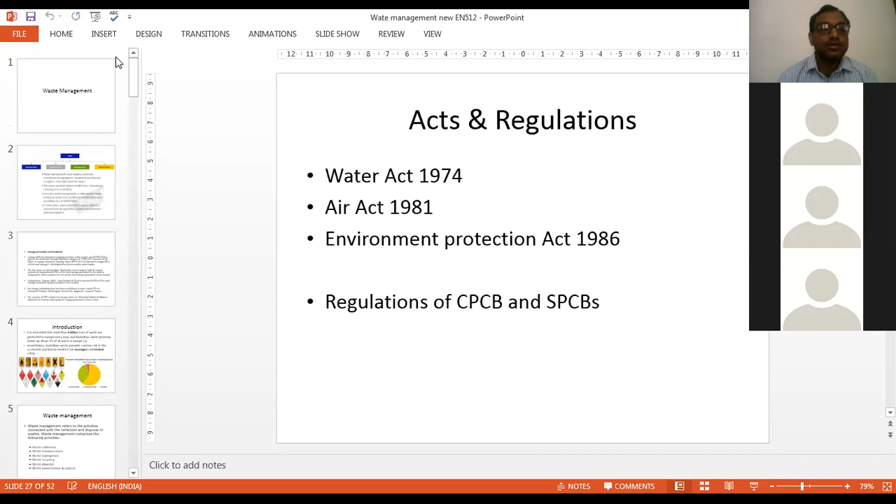So waste management. So I'll quickly run through a few things which you might have already gone through. If not, it will be a quick recap in terms of some concepts and topics. This we have already discussed, what are the different types of waste and all those things. Its management is the crucial one, and that is one of the focus of the third unit.

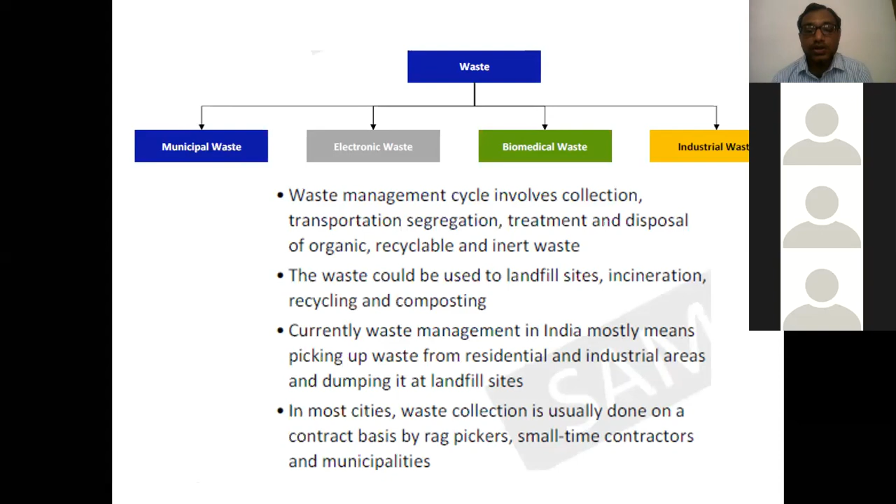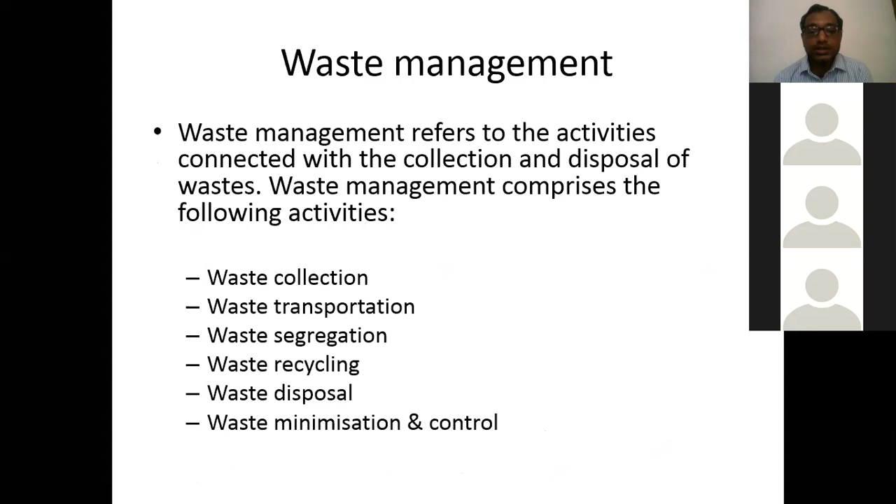So when we say waste management, the important things involved are waste collection, waste transportation, segregation, recycling, disposal, minimization, and its control. There are different aspects which need to be corrected. And from that point of view, several concepts have emerged, and out of that, waste management hierarchy is one of the important concepts. Now, what is the meaning of waste management hierarchy? It is a nationally and internationally accepted guide for prioritizing waste management practice.

So far we kept discussing source reduction, waste volume reduction, waste strength reduction, and then different treatment processes in terms of technical details. So from that point of view, prioritizing waste management practices with the objective of achieving optimal environmental outcome. The environmental outcome is a clean environment, producing less waste or no waste into the system. So there is a certain set out preferred order. What is that preferred order?

It is a tool in the evaluation process that protects the environment alongside resources and energy consumption, from most favorable to the least favorable action. So when we say order, something is called the most preferable or favorable action to the least favorable action. We'll quickly look into the next slide to get an idea of what is waste hierarchy. Again, it is an important basis for sustainable development.

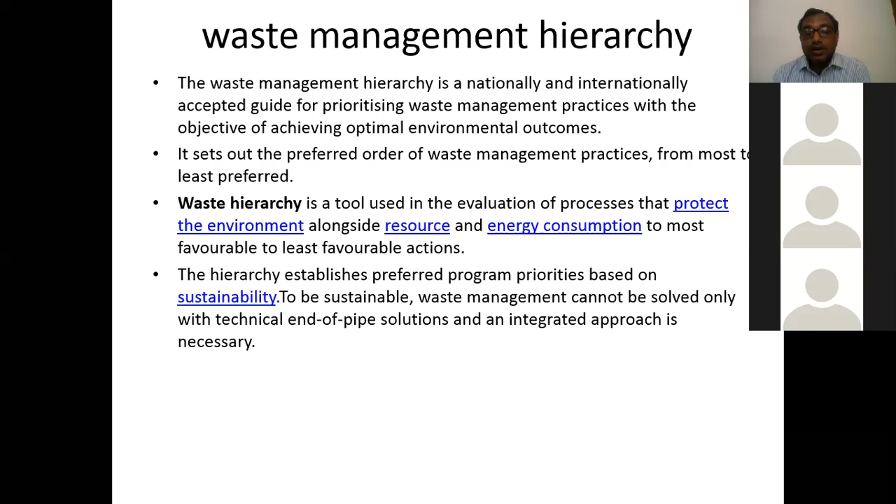Sustainable waste management cannot be solved only with technical end of the pipe solutions. What is the meaning of end of the pipe solutions? Anyone can quickly answer through the chat platform? After treatment. Yes. It means once you create the waste, the waste is taken to the treatment facility and then it is treated. So it is basically an integrated approach, meaning what we discussed as source reduction and subsequently the end of the pipe approach.

So it indicates an order of preference for action to reduce and manage waste and is usually presented diagrammatically. In the subsequent slide you'll get an idea in a pyramid form. Pyramid means something is at the apex, something at the base, so something is considered the topmost priority. From the topmost, if you go to the lower one, that is what we discussed in the beginning, the most favorable or acceptable to the least favorable options. This hierarchy is based on that.

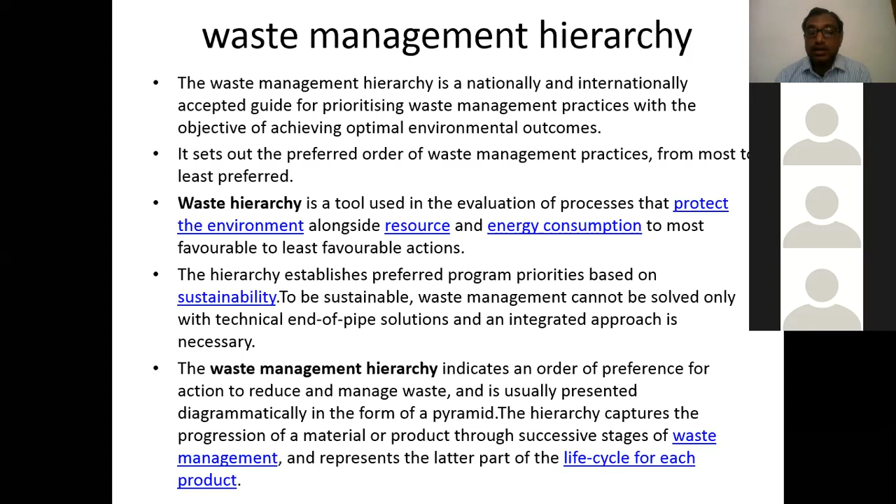And at the same time it also helps the life cycle approach of each product. That's what you are already going through, and one example was given of the food industry. Recently I was going through Science Direct. There are plenty of applications of life cycle analysis or assessment, and new concepts are emerging. Basically there are three different components: analysis, assessment, and one more thing which comes as part of life cycle assessment from the waste management point of view, and it is applicable everywhere. So what is that hierarchy?

So on the left hand side it shows you what you are supposed to do or what is your useful gain, and at the top you are getting what your outcomes are. And at the same time it talks about how you have to approach that pyramid. So the first step is remove. That means don't generate the waste. That is the mantra, or that is the important priority in that particular thing.

Second comes reduce, reuse, recycle, recover, treat, dispose. These are the steps. And if you adopt this management hierarchy, for something you are generating as waste, if you try to reduce and recover and then recycle, as we have seen in the previous slide, you are conserving the resources, you are maintaining the environment, at the same time you are opting for sustainable operations, and based on that you will end up getting the maximum returns in the system.

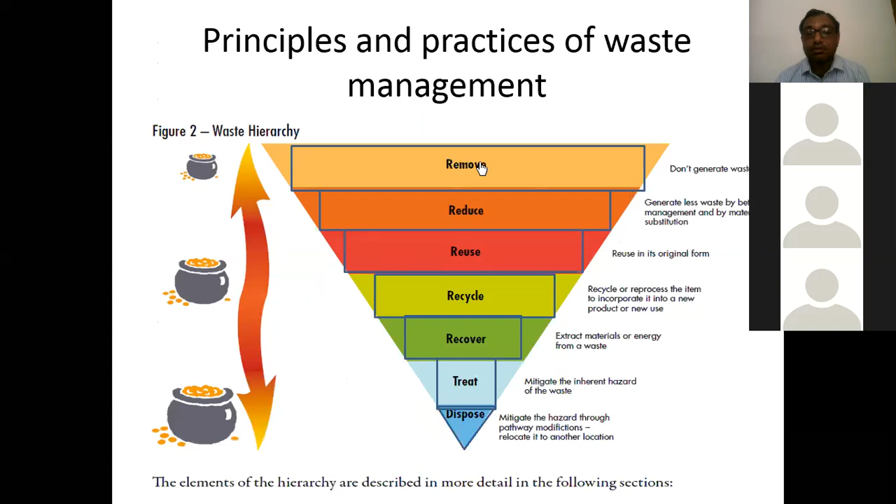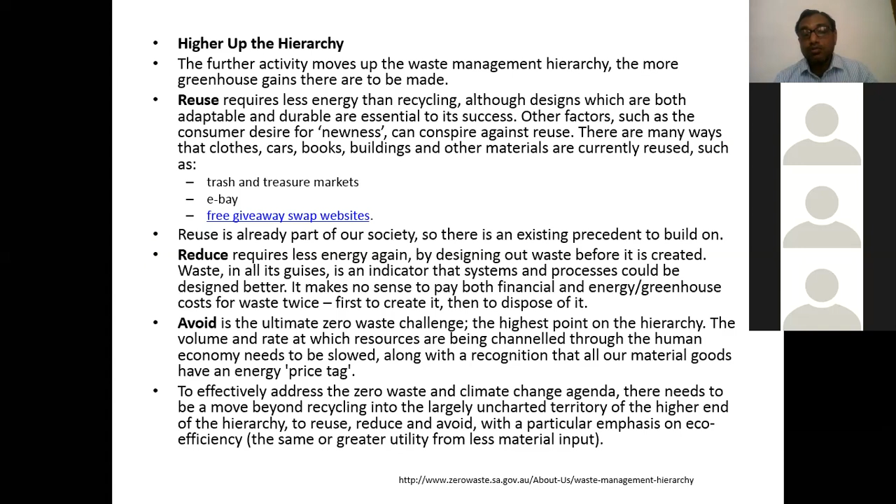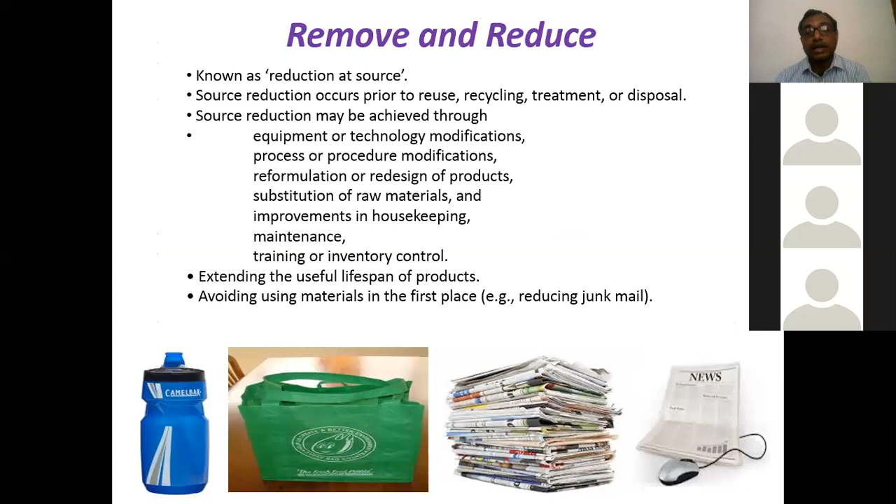So when you say remove or reduce, what kind of articles, activities and substances come in that category, and how those things can be put together. Again, one important point: some of the things are generic. They are not exclusively from the liquid waste point of view, but generally solid waste. Sometimes some of the things are extended to liquid waste as well. So for remove, what are the source reductions? Source reduction can result from any activity that reduces the amount of materials. For example, redesigning of products, which we already discussed, source strength reduction, waste volume reduction. Most of these keywords or key phrases have already been given.

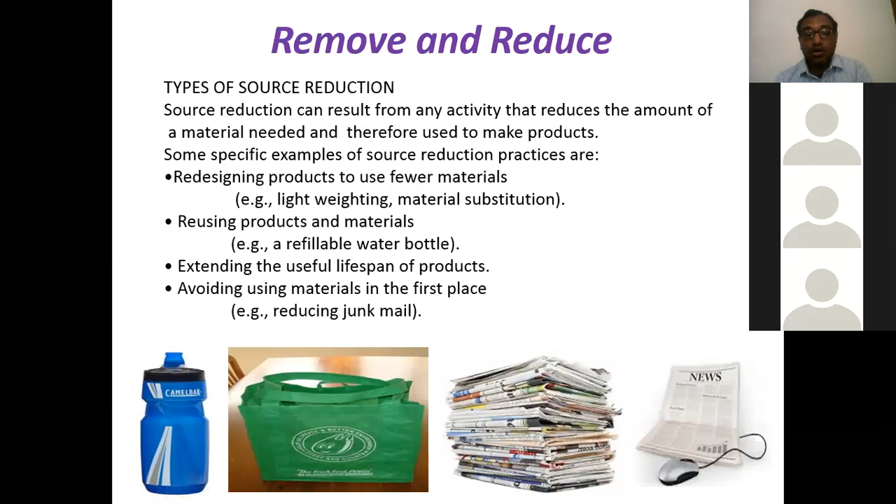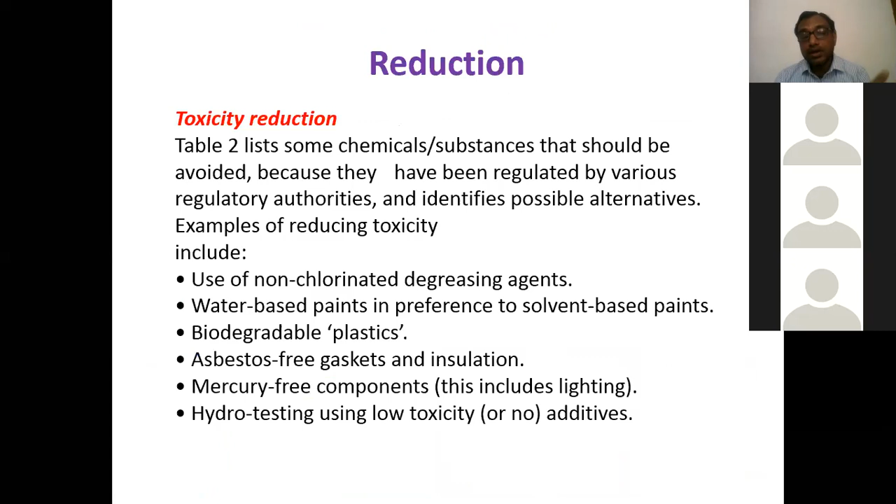And with some examples, some of the things are basically mentioned here. Then reduction: again, it depends on what nature of the material is there, toxic, non-toxic, biodegradable, non-biodegradable. You need to work it out, and accordingly the relevant materials need to be treated or reduced in the activity.

So from the EPA guidelines point of view, some of the substances are enlisted here. Some of this data I'll share with you later on as notes or something. Here, I just want to touch upon the other aspect.

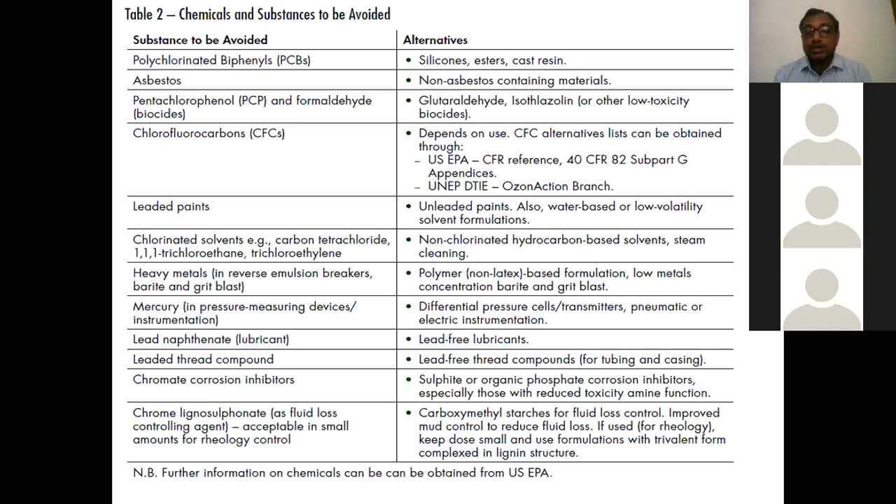So just quickly, there are chemicals and substances which are already identified by EPA and all other international agencies working on and looking after the environmental aspects. And sometimes their respective alternatives are also provided, because you don't have to point out only the problem, but at the same time you have to provide a solution to the customer end or from the business point of view. So some of these lists are provided.

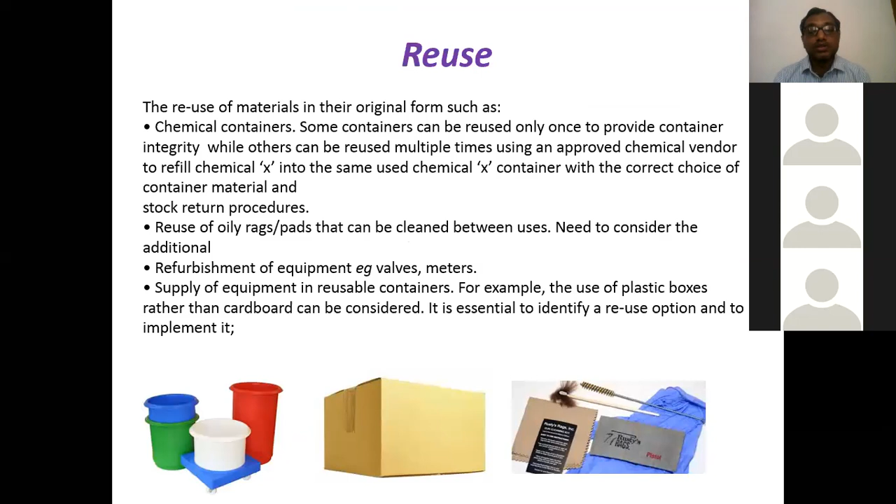In case of reuse, there are certain guidelines and notations to be used and worked out for reuse kinds of materials. Then recycling: there are different materials which can be recycled, like metal scraps, drilling mud, solvents, oil waste. They can be reutilized in different ways to the best extent possible, for example the tires we are generating, just giving an example.

So grind the rubber tires of automobiles, four wheelers, two wheelers, and you can create high speed railway platforms or tracks out of that. You can prepare streets blending it with tar, so that tire waste can be utilized. Or for small kids, most of the European, South African, South Korean and Chinese countries are using playground platforms made out of shredded and properly mixed rubber particles.

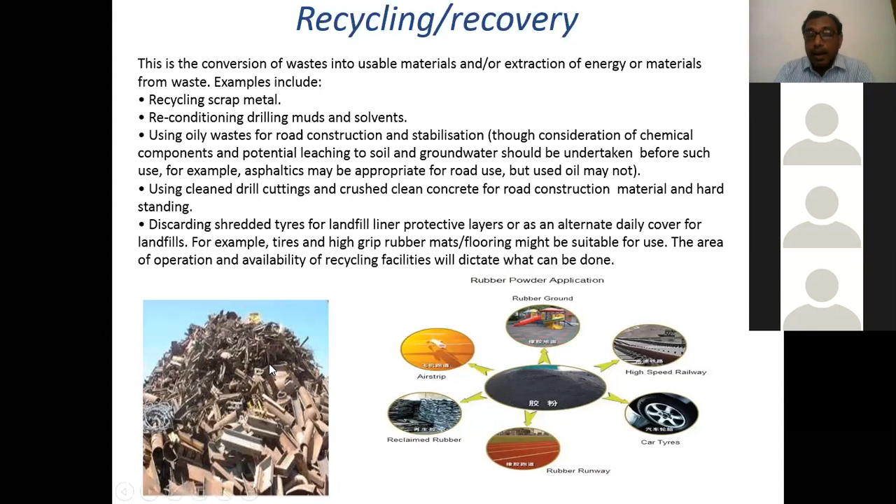So the ground remains more shock proof. Even if the kids fall down, they will not get hurt. Like that, reclaim applications can be worked out from recycling activities. And of course, what is the residue?

One aspect again is incineration activities; thermal methods, chemical methods, or biological methods can be utilized for whatever is being followed: remove, reduce, recycle. Whatever is left out can be taken care of as residue treatment, and if something is left out of that, you can try to recover the valuables, maybe minerals, elements, that can be reutilized for value creation or value generation.

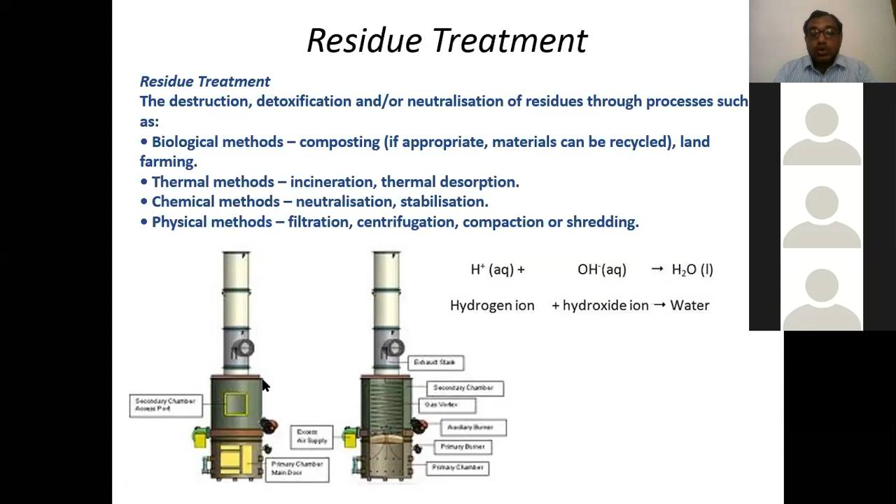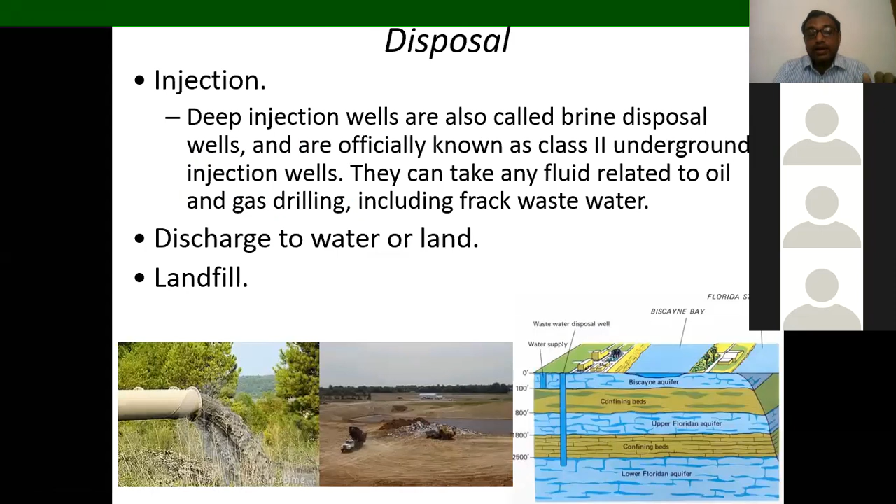So these are the important aspects, and of course at the end, the sludge is also prepared depending on its nature, whether it is hazardous or non-hazardous. It can then be treated; that topic, sludge waste management, we'll discuss separately. But what is left out from the previous activities goes to residue treatment, and at the end, what is completely discarded can be dumped in landfill sites or underground, buried in deep ocean bases and so on. This is what is generally taken care of as the waste management hierarchy.

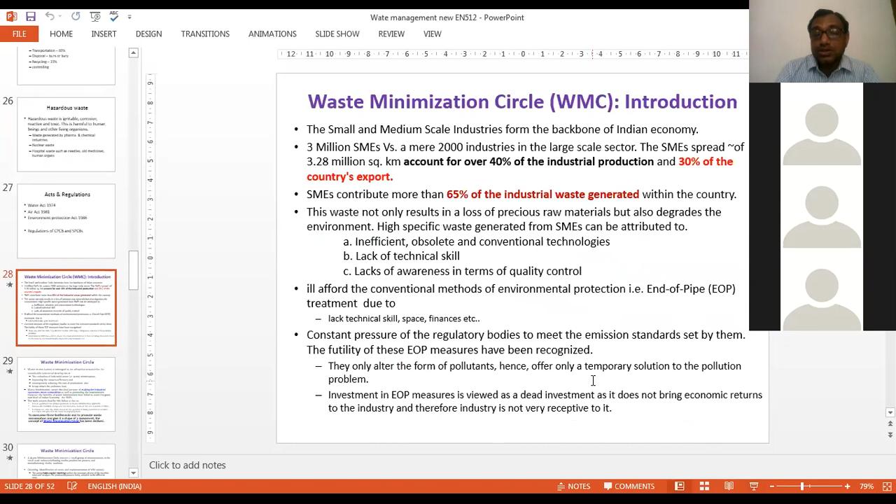So now I want to come up with a new concept, that is the waste minimization circle. Pollution prevention is one aspect. After that, energy audit, life cycle analysis, all these things are integrated and important from the perspective of waste minimization. The word clearly indicates minimization or complete elimination of the so-called garbage, trash, unwanted or polluting things. This is the concept or important mantra.

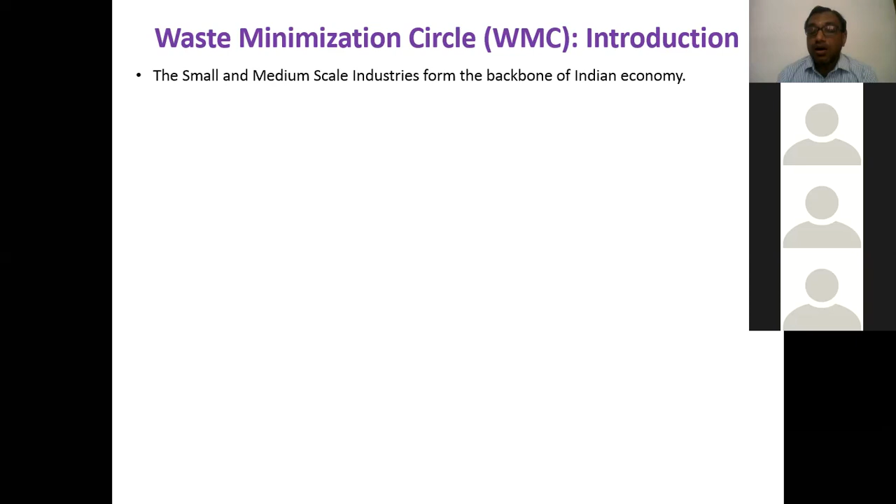So from that point of view, some things are applicable or easily adopted by good business houses or big companies, but some are not so easy for small businesses. And from that point of view, this new concept has come up, the waste minimization circle. So what is this waste minimization circle? The small scale and medium scale industries are, of course, and if you see the recent activities, and once the lockdown